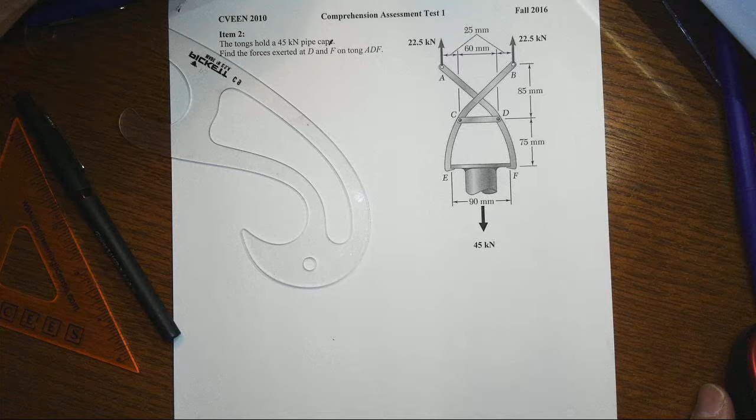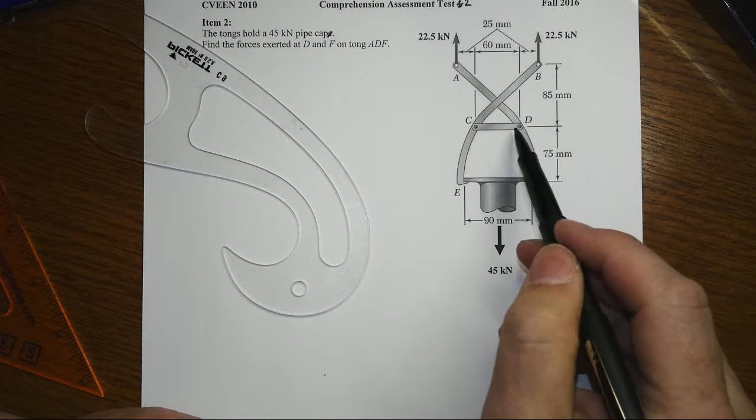And the second item on test number 2, we are asked to find the forces exerted on this tong, ADF, at the pin point locations D and F, as this set of tongs is holding a pipe cap that has a 45 kilonewton force on it. So let's pull off ADF as a free body.

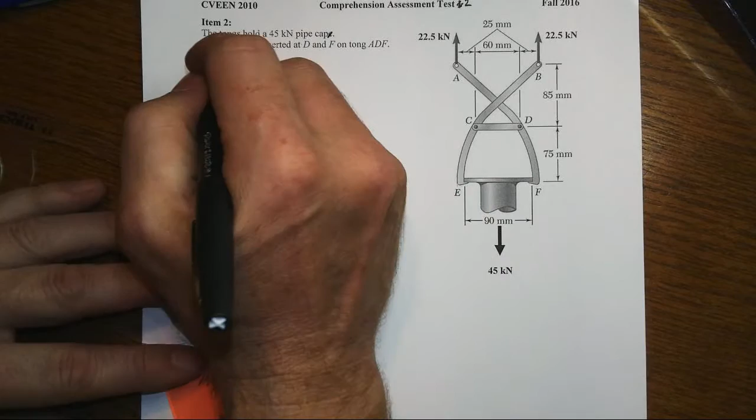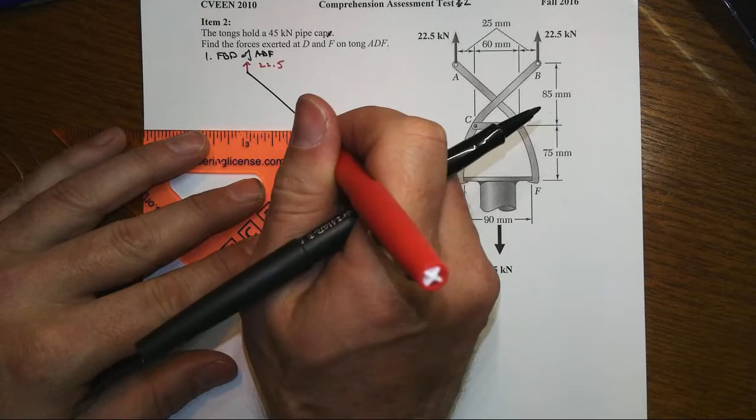And we'll have our 22.5 kilonewtons at the top. We've got member CD, which is pinned on either end, and so it's going to be a two-force member. I'm going to assume that it's in tension. You'll see in a moment that was a pretty good choice.

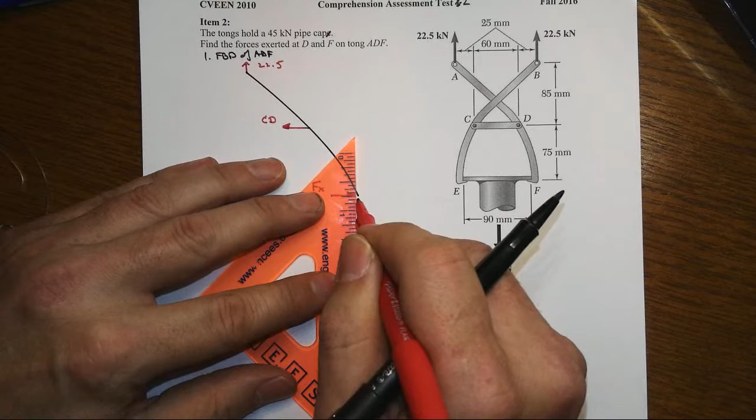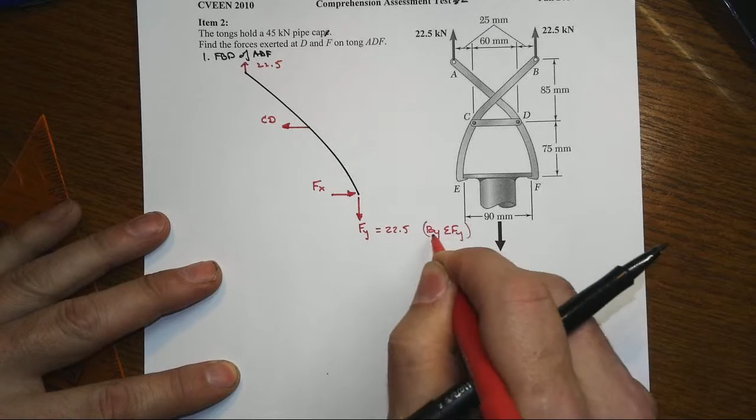And down here we're trying to hold on to the pipe cap, so the pipe cap is going to push back, but it's also got to hold on to, the tong does, the pipe cap, so there's going to be a downwards force there. And we can see in a very trivial sense already here that Fy has to be equal to 22.5 by a summation of forces in the y, and that also Fx will have to equal CD by summation of forces in the x.

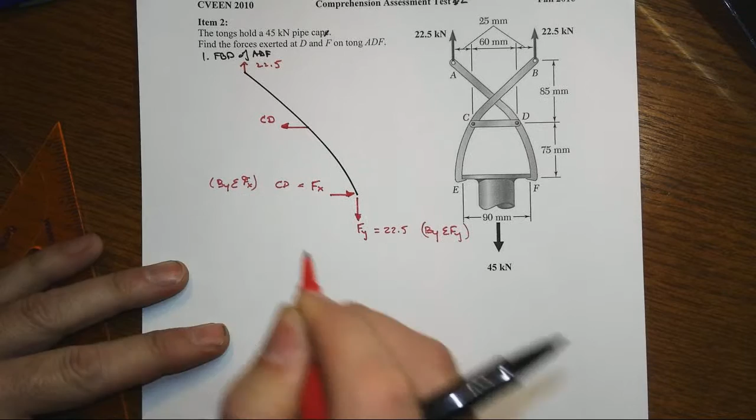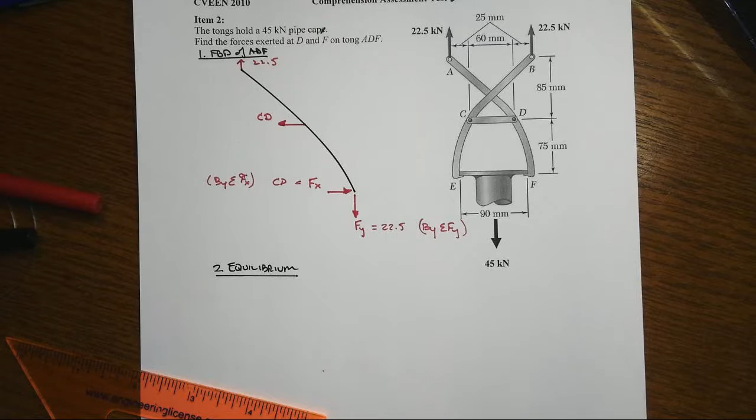Okay, and so now what we can do is we can apply equilibrium here to find the requested quantities. And let's note our

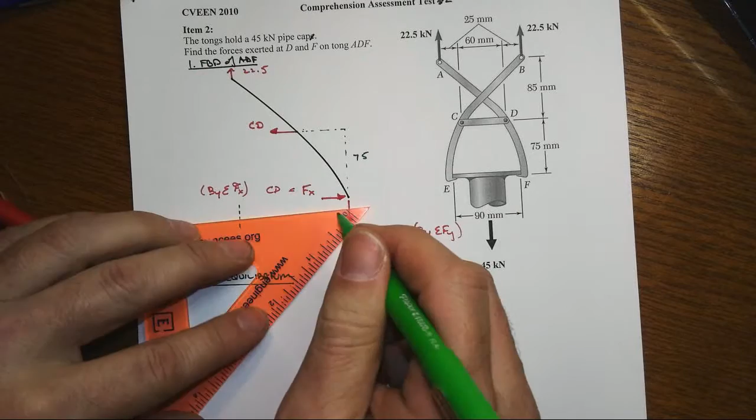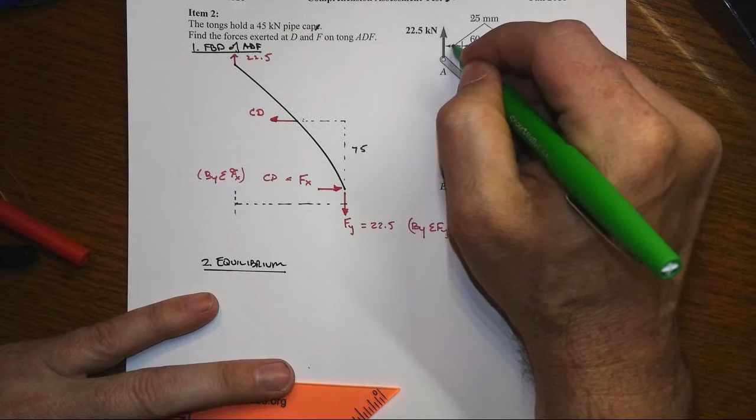distances that we've got here. CD is up from F at 75, and then we're going to need to get what turns out to be the distance in this force couple over here. Now that distance we've got to be a little bit careful of here. Note that to get to the center line, we've got 25 plus the 30, and then from the center line on over to F would be 45. So this total distance here is 25 plus 30 plus 45, that equals 100.

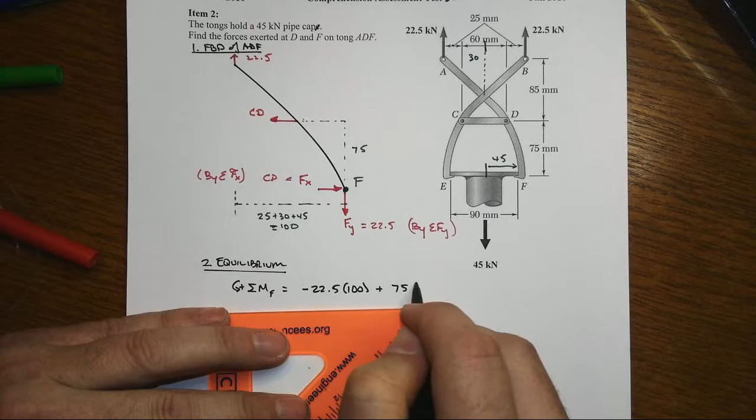And so I note as I look at that, we could, if we sum moments about point F, we're going to be able to get CD right off the bat. So let's do that. Sum moments about F. We'll take counterclockwise as positive, so we'll have a minus 22.5 times the 100, and then plus 75 times CD, set it equal to 0, and we will find out that CD is equal to a positive 30 kilonewtons.

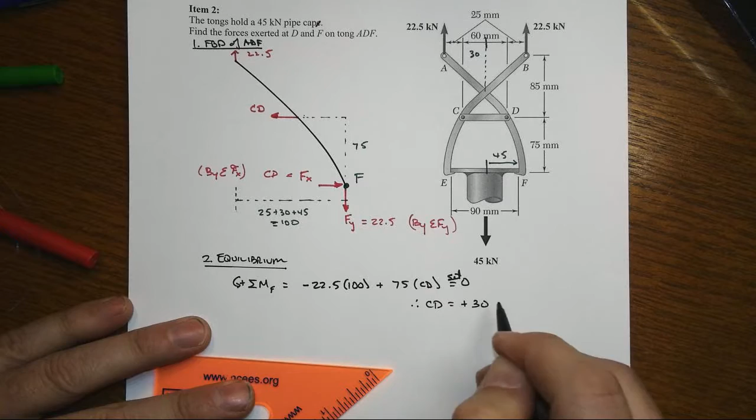And again, the positive indicates that the member CD really was in tension, and magnitude here is of course 30. We're good to go. And we've already figured out what Fx then has to be by summation of forces in the x. We'd have minus 30 plus Fx equals 0. Therefore, Fx we wanted was 30 kilonewtons acting to the right, as shown there.

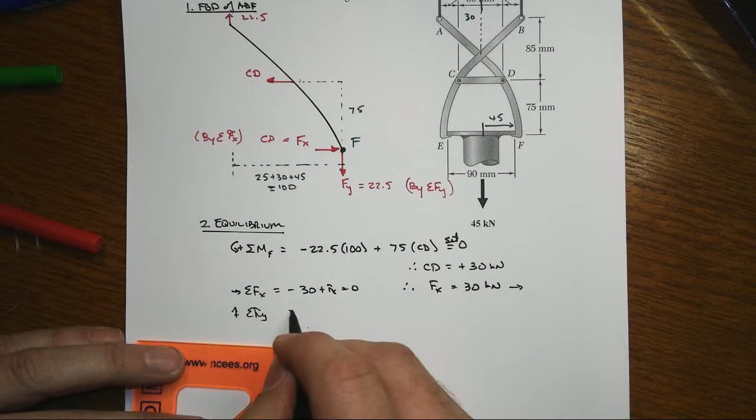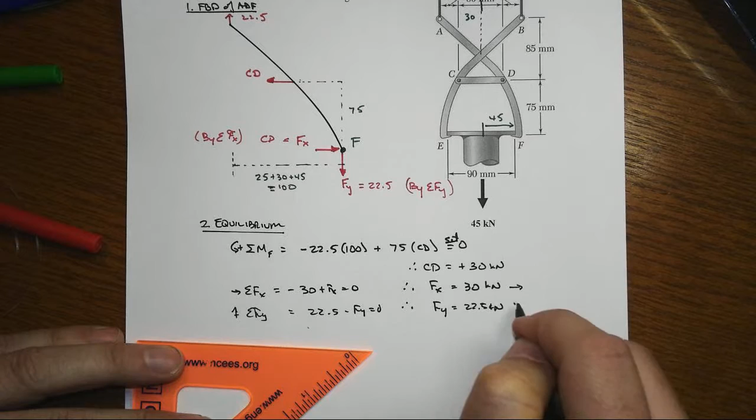And then, of course, sum of forces in the y, we've already mentioned this before. We get 22.5 minus Fy equals 0. Therefore, Fy is equaling 22.5 kilonewtons acting downwards on that particular pin.

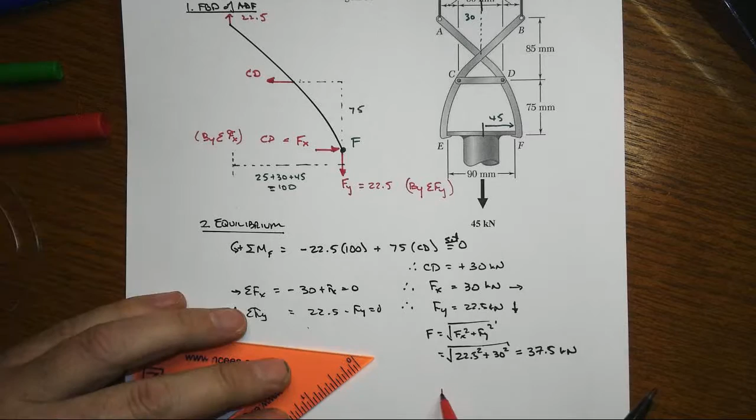And so what we really were asked to find, though, was the magnitudes here. So F equals square root of the sum of the squares, and so that's going to be equal to 37.5 kilonewtons. So our answers here are that the magnitude of the force at D, the pin at D, is 30 kilonewtons, and the magnitude of the force at F is 37.5 kilonewtons.

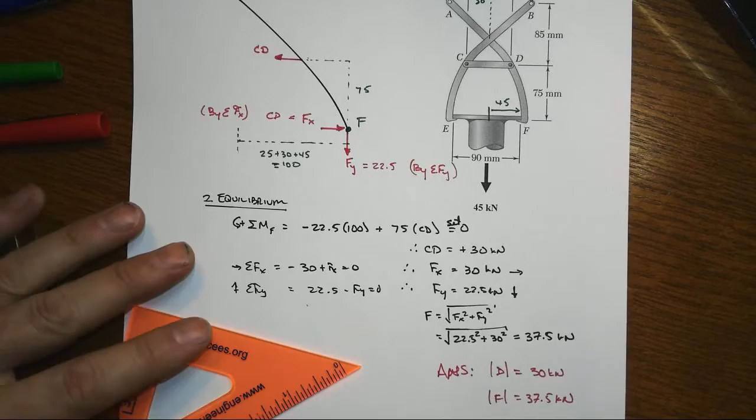And note something here, that we actually have a 3-force member, right? We've got 1, 2, 3, 4 forces, but remember these acting at the same point, so really they are a single force. And since you could redraw that acting there, note, if you have 3 forces on a body, then they must be acting concurrently.

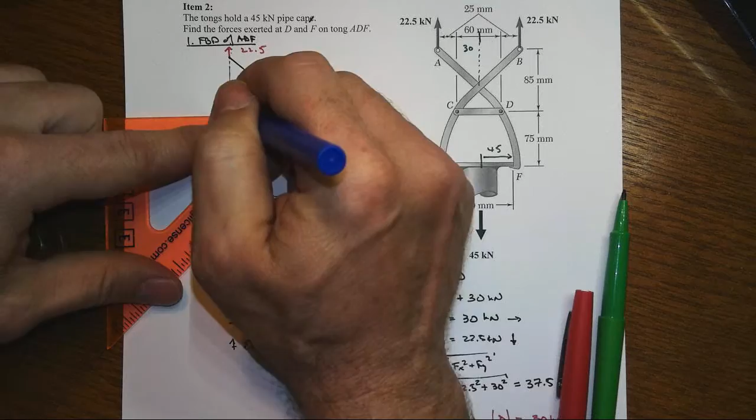So all we have to do is take the 2 forces where we know their lines of action. Where they intersect is where the third must also intersect. And that tells us that that force at F actually had to run through this point that we might have called point G. And we could have used that along the way to have gotten to where we wanted to.

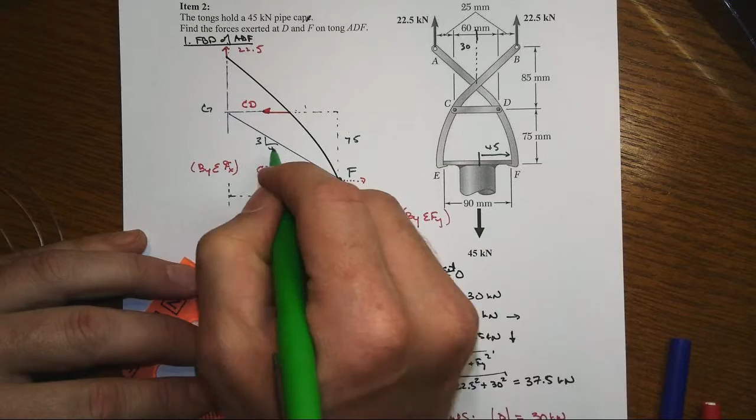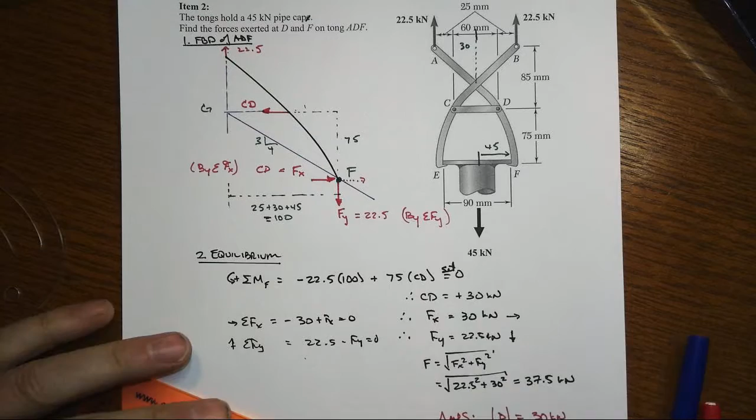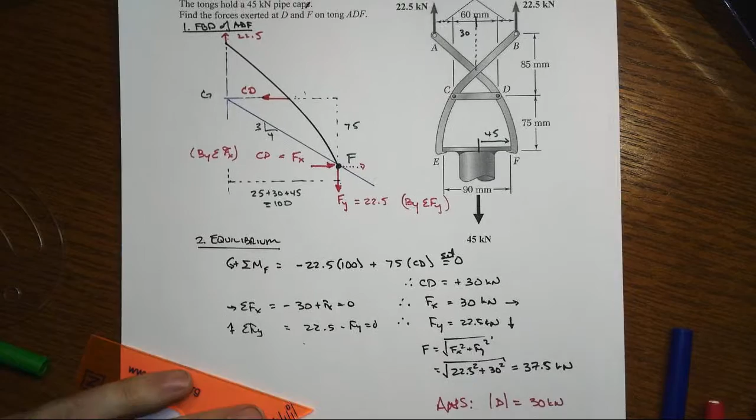Right? That big triangle is 100 by 75, which is a 3 to 4 ratio. And sure enough, when you look at Fy, the smaller of the two, 22.5 divided by 30 is in a 3/4 ratio, which these two have to line up along as a resultant along that particular location. So we could have used that if we'd wanted to as another way to have gotten to our final answers here of 30 kilonewtons and 37.5 kilonewtons.